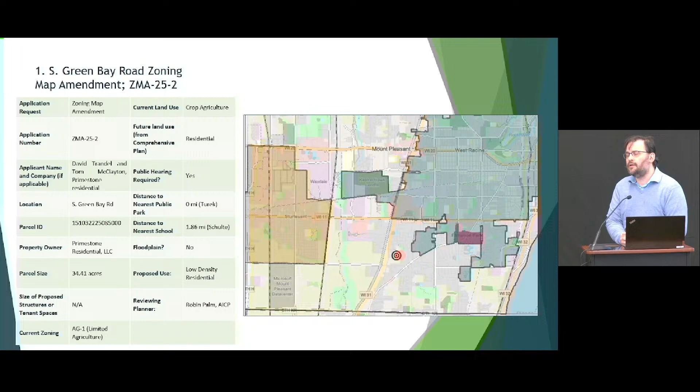No, I do appreciate that, I understand. The reason I ask is that in the context of this development application, previous discussions were also about dedication of the land to protect the wetland. So I'm thinking, in the future with respect to this zoning and this plat, how do we ensure we pursue that path of land dedication instead of the fee? I understand it will be a down-the-road negotiation, but I don't know how to protect that.

The area identified for the Root-Pike WIN plan, as well as the stuff adjacent to James Turek Park, none of that has ever been developed in any of these iterations of plans. That has always basically been the wetland area or an outlot. As you get further away, the only two wetlands actually disturbed are very minor ones that would be filled using a DNR fill permit, which is allowed for areas under an acre, I believe. I'm not super proficient on that.

That is definitely something we can talk about, and since they propose to dedicate that entire area you're talking about, that would be up to you guys on the village board. Okay, thank you.

Robin, go ahead, Tom. Since you two have introduced the concept of dedication of land in this park area, I want to ask, based on your notes, this option exists for the village to take land for park purposes in lieu of park monies. This seems like the perfect candidate to do that. You have a park right there on the edge - if ever you're going to do this, why isn't this the time to take parkland when it's adjoining an existing park?

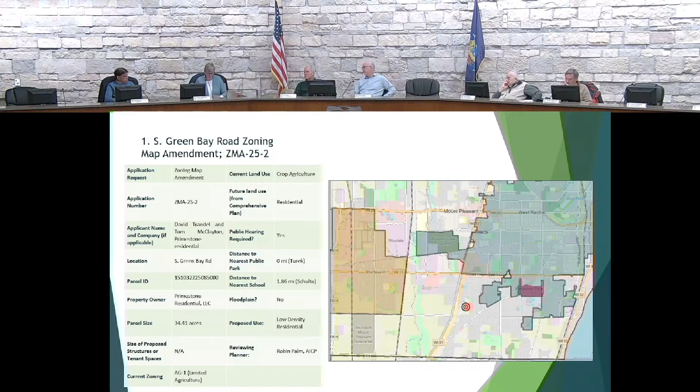Mr. Chairman, yes, Nancy, to Robin. I have a couple of comments, as a follow-up to Commissioner Van Beckham. My first question, Robin, is what are our current park fees, the park impact fees?

I think it's $1,100 a lot or unit. It's more nuanced than that. Hold on one sec, it might have been revised since then.

All of the impact fees are collected by the building department when permits are pulled, so I never get to see those. Studio and 1-bedroom is $550 a unit, 2-bedroom is $825 a unit, and everything above that is $1,000 a unit.

So in order for the board to consider taking that dedication, they'd have to be looking at the value of the impact fees. Those impact fees have timelines on them for use, and can be used in any park within our park system. So that's going to be a big decision for the board to make, to lose that kind of revenue for this area.

My second comment is, like Trustee Boccia, I have been receiving phone calls actively from the neighborhood. One question that has come up was regarding that park dedication and its presence within our land use plan. I got home from a public hearing in Kenosha County last night, where I was promoting approval of the Root-Pike WIN South Branch project in Kenosha County to help finish our leg. It was unanimously approved, by the way.

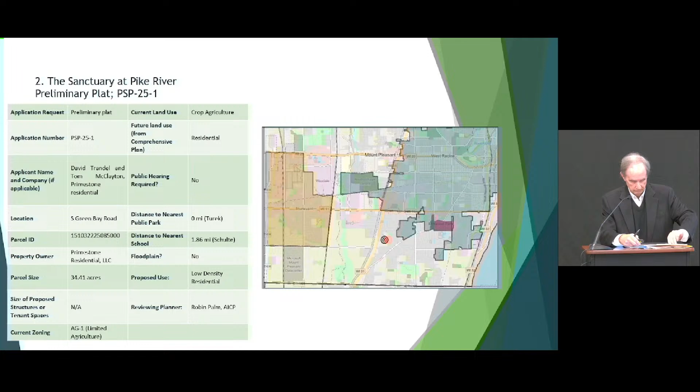As soon as it's up, I'll... one folder up from that. There we go, it should be there now. Okay, go to that. Do I move this forward? Yeah. Robin?

This is an aerial of the site, and we just talked about Turek Park. You can see on the north there, the vast majority of the park is to the north. I don't believe there's much, if any, parking for that park. This site drains from south to north, so it drains toward the park, which is why our plans show the majority of the stormwater ponds on the north side of the site. On the east and south sides there's residential. On the south and east is the Serbian church, and then our entrance we have some land on Old Green Bay Road. And there's the Biscayne residential in the northeast quadrant.

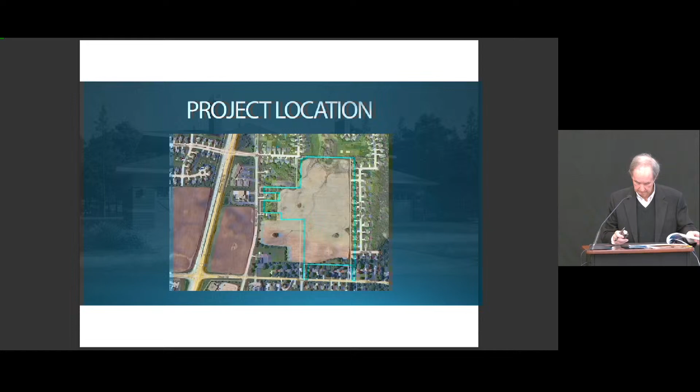As we talked about, we're talking about RL1 zoning. When we first approached the Plan Commission and the board, with Robin and Sam, we were contemplating much more moderate zoning, and I think the first time we looked at this, we were almost up to 300 units. The first presentation we made back in January of last year was 213 units, with the vast majority being 4, 6, and 8 unit buildings. We've since reduced that to a total of 103 lots.

There's 46 single-family lots, basically on the perimeter on the east and on the south along Royal Oaks Drive and Brown Road. In the interior, they are duplex lots. They're duplex, not twin homes, so they're contemplated as just one lot for 2 houses. But that's how we've set it up, our civil engineers set that up nicely for us.

This will give you an idea of the current layout. As you can see, the dark blue on the left of your screen is actually north, that's where all of the stormwater will be detained. There's about 3.5 acres of wetlands, and about 2.5 acres will be preserved on the site. There are some small pockets we're working with the DNR to fill in, and I think we're in line to get the permits to fill in those small areas. There are 7 areas of wetlands total, and the 2 primary areas on the north are the 2 that we're retaining.

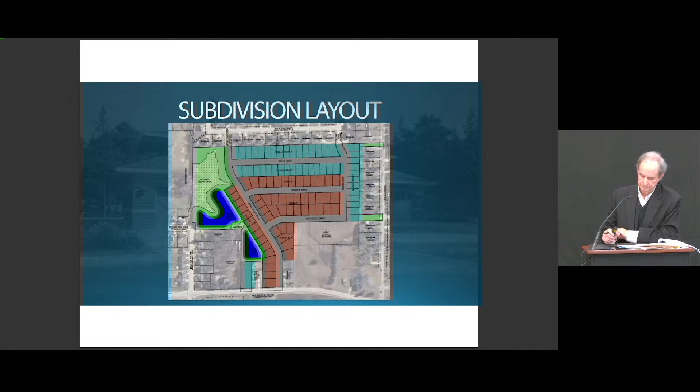Cyan? Got it, and the color, right? Brown color, the duplex, these are duplex. Just want to make sure the brown lots are the duplex lots. Thank you.

This is an example of the duplex. You'll notice the garages are separated. We haven't made up our mind whether they should be together or separated, but hopefully this gives you an example of what we intend to build there.

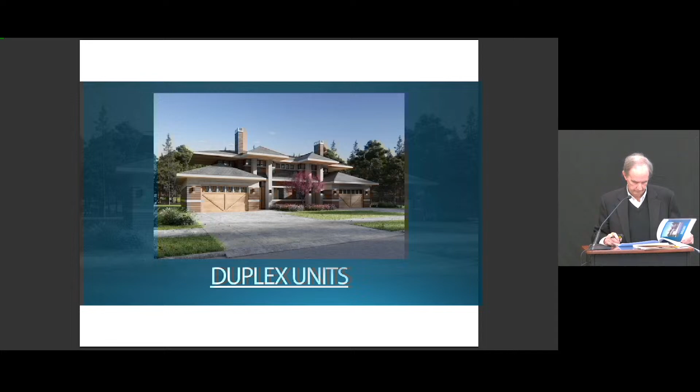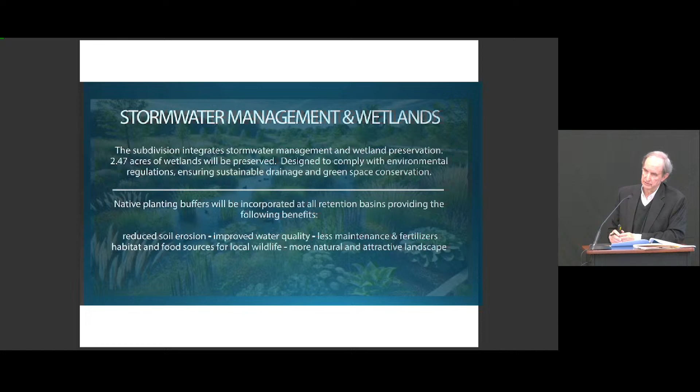We've been working with our civil engineer, Nielsen Madison Barber, to create a stormwater system that will handle the entire site without any issues. We're going to preserve about 2.5 acres of wetlands, primarily on the north, and along those wetlands we'll be planting flowers to make it look very attractive.

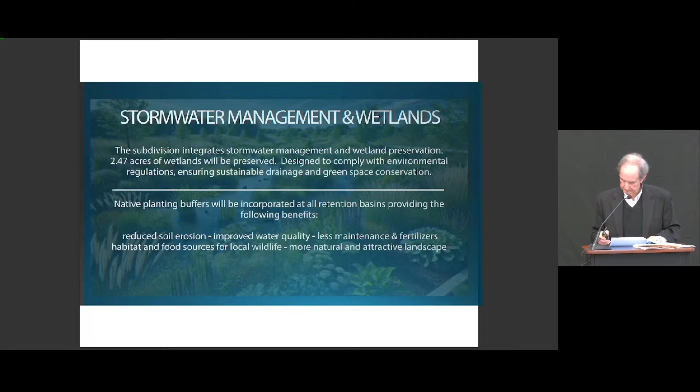One of the things we're focusing on recently is the need to create a homeowners association to handle primarily drainage, stormwater, and other common expenses, but there are other things that will be part of that. So each unit owner will have a proportionate share of these common expenses.

The only thing that's maybe different between the duplexes and the single family is the roof and the exterior, because you've got maybe 2 families living in the same building, so we need to accommodate the possibility that one of the roofs goes bad and the other doesn't.

Over the last year plus, we've attempted to reduce the density. We've gone from 213 down to now 160. We've reduced the density of a particular lot, whereas we had 4, 6, and 8 unit buildings. Now the maximum is a duplex, which is a 2-unit building.

One of the things we've done here, as you can see, there were originally 5 entrances: north and south on Providence, Old Green Bay Road, and 2 smaller entrances onto Royal Oaks. We've requested a reduction in the number of entrances from 5 to 3, and in meeting with the neighbors and thinking about it with our engineer, eliminating the north and south entrance to Providence Drive will reduce traffic significantly, cut-through traffic, raceway traffic, however you want to call it. It'll also help us enlarge the stormwater basin on the north side and help the drainage considerably.

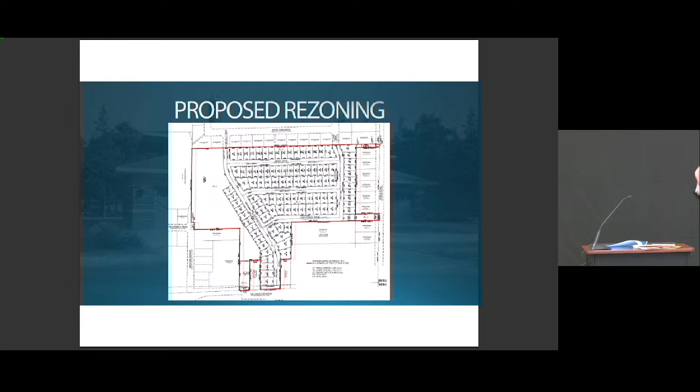There's one thing - as you can see, there's an entrance off of Braun Road, the bigger of the two. That's actually a dedicated driveway easement, so we have to plat that, but it's not part of 103, that's Unit 104. So what we did there is just leave that as platted. We don't intend to do anything else because we can't - it's been an easement for probably 15 years.

The other thing we did from previous plans is we moved the entrance off of Green Bay Road further south, which we thought better, more toward the church site than the other site there. I think that helps the neighbor, Mr. McGraw, on the old Green Bay Road. And I think the closing of the north entrance to Providence Drive is critical to the neighbors, and it also helps us in expanding our stormwater system.

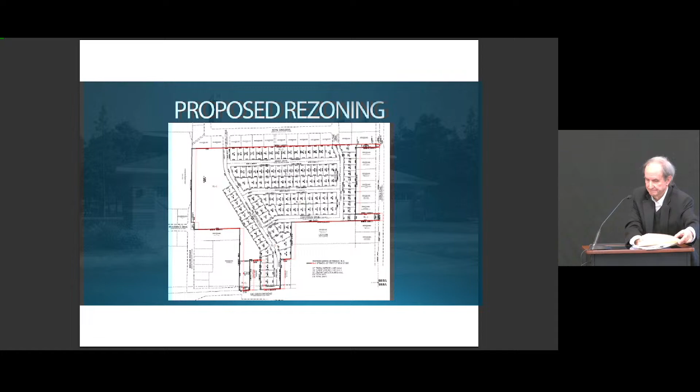Thank you for the presentation, and I can see from some of your additions to your restrictive covenants that you are hearing us a little bit better. I have a question regarding the duplexes.

Within our code, you showed us a beautiful picture of a beautiful structure, obviously very North Shore, and having sold real estate in that area for 15 years, I'm very familiar with it, but it's a beautiful building. My assumption is that you might potentially be, is the intent that one person is gonna build that 2-unit building and own both sides? Or is your intention that potentially one side would be one owner and the second side would be a second owner?

It could be somebody who owns the building and rents out the other one. It could be either way. We'll set it up so that each of the duplexes, 57 lots for duplexes, which means 114 units. So there'll be 114 unit owners that will pay into common expenses.

And I guess my question, and this might go to staff, Sam or Robin, when we've talked about the code and we've talked about these duplex lots, I've had a lot of questions on them over different projects we've seen. So it's my understanding that under the RL1, let's pick any lot that's a duplex, say lot 27, or a lot you choose to build a 2-unit home on. Under our code, in order for you to sell off that second unit, it's my understanding, from talking to staff, that lot would have to be further divided in order to do that.

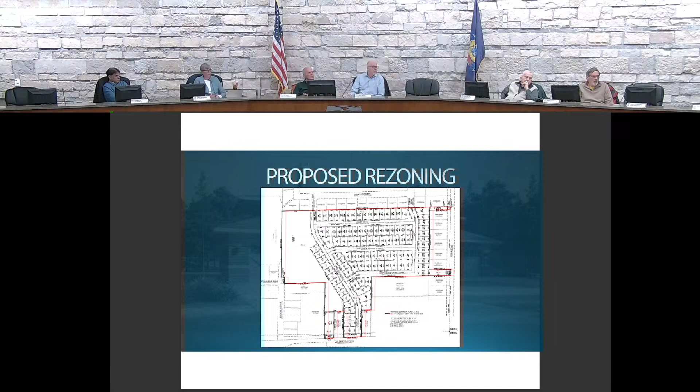Robin, where do you want to go from here? Okay, so if you have any other questions of me, you can ask questions of me. Otherwise, I would prefer if we basically decided and voted on the zoning issue.

If you wanted to take any other comments on it, now would be the time, but you'd probably want to limit it to the zoning issue, because we don't want to go far afield into all the things we'll discuss with the preliminary plat, which includes roadways, park dedication, lot sizes, entrances, exits, and all that sort of stuff. So that decision is up to you guys, but my recommendation would be to consider the zoning itself, RL1, and then move forward to the preliminary plat.

Is there any public comment specifically on the zoning? Not on the preliminary plat, but on the zoning specifically? Please come up, name and address, please.

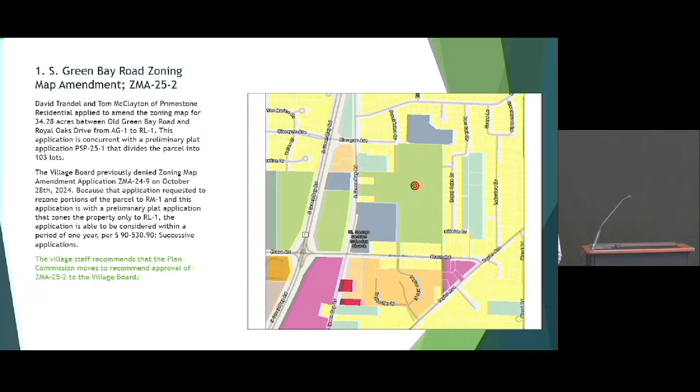My name's Ted Snagowski. I live at 3627 Providence Drive, so I am one of the neighbors. There has been movement, and you said they're hearing us a little bit, but we continue to come back to these multifamily structures on a single lot that doesn't fit with anything in our neighborhood. So you go RL1, a zoning change that was, I'll say in my words, snuck through during COVID, that allows 1 or 2 structures on a single lot.

Just like this whole process, the communication has been terrible. Again, we got no notice of this meeting. We're 300 feet from the edge of this development, and we got no notice. Thankfully, Ann and a bunch of neighbors are still keeping an eye on it. So I reject the RL1 without the same restrictions that they're imposing on the east and on the south. Impose a single structure per lot under the RL1. Otherwise, get rid of the RL1 — it's meaningless.

To that end, I know I speak for a lot of my neighbors, and we'll all be at the meeting next week. But this is a terrible piece for our neighborhood. You sit here and talk about waiving fees and taking park space, yet we keep being told this is for revenue for the township — we're talking out of both sides of our heads here. I sit here in this meeting, and I'll be honest, I wonder, and I'm asking a real legitimate question of all of you: why do you continue to have this group if it's just going to rubber stamp these types of programs every time they come up? That's what it's done so far. Why is this meeting during the day when most of my neighbors can't get here, when other communities have figured out planning commissions should be held when the public can actually attend and see the planning? So I oppose the change to the zoning as it sits now.

I want to add in for all of those that might not be familiar exactly what the term conservation plat means, not to be confused with the general idea of conservation, where we set aside natural area to be conserved. It's a very specific type of development where all on one parcel you have a portion that's developed, contained within a small portion, and it's also attached to a portion that remains undeveloped, and they're kind of married together. It's not like a pure park or preserve, it's actually a developed parcel. It's just the ratio of development to preserved land is set.

Sorry. I always got a 'but actually.'

All right, any other discussion on this? Otherwise, if not, I'd be looking for a motion.

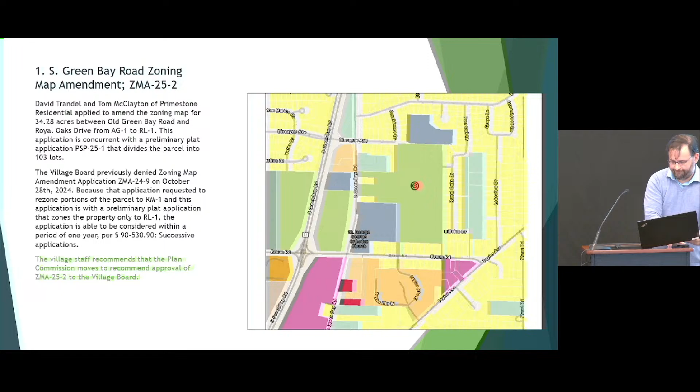Chairman Davis, I think we have tried to make sure as best we can that we keep this discussion regarding zoning to zoning. And I know that it has had to take some walks off into the plat, and I really think in this case the plat is the bigger decision, and is gonna have even more conversation. I think at this point, what we're looking at is what is the highest and best use for 34 acres of infill site surrounded by existing residential zoning.

We have already made it clear that the RM zoning category is too dense, too big a units, and not acceptable to the Plan Commission and the Village Board. The developer has now come back to us with a plan that is a combination of uses allowed under the RL1. Although I know there are those in the audience in the neighborhood that don't like the idea of the duplex lots, the reality is that in this design, which is what we'll be talking about next, they are concentrated to the inside of the development, and very few, if any, of the existing neighbors are gonna see or feel the impact right against their properties of a two-unit property.

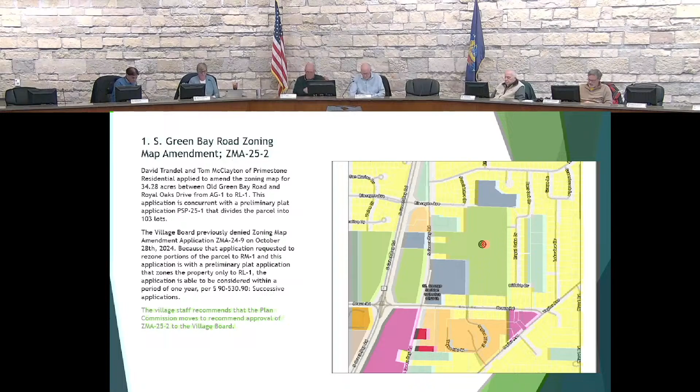That is for the zoning amendment. Next, we are moving on now to the Sanctuary at Pike River preliminary plat, PSP 25-1. Again, there will be time to speak.

Okay, so we're going to try to get through the main things we normally do, and then address the decision you get to make and the discussion we get to have. So this is PSP 25-1.

As before, it divides the parcel into 103 lots. There is information about lot 104 not actually being usable to build a home on because of an easement. That's new, but we will talk about that when we get to it.

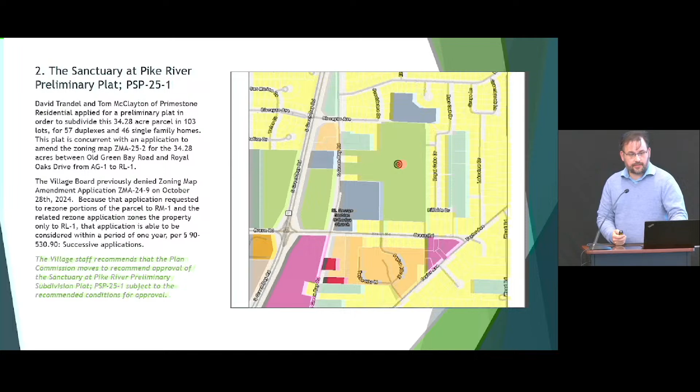Okay, so it's for 57 duplexes and 46 single-family homes. Although, as we said, the code does not specify necessarily which is which, the developer has indicated that in its site plan application. The zoning would be RL1, and we're going to move on to this one.

So we reviewed this, the overall site plan, or the preliminary plat as submitted. On the left in small print are the conditions on the site plan as is, assuming the exception request is granted. A lot of that is either boilerplate or things we ask developers to add to plats that aren't standard—we ask for a little more information on plats than normal.

Two of them are basically related to finalizing engineering and stormwater plans, which is always worked out between a preliminary plat and a final plat. One is about the public walkway created as part of the Royal Oaks subdivision between lots 82 and 83. There are also 20-foot vision triangles at intersections, public street lamps on intersection corners that need to be indicated on the plat, and street trees—those have to be approved by the Public Works Director.

To clarify, we haven't had these conditions left off of CSMs for quite some time. The CSM actually has them because we sent it back with those comments early and got them back, so it's not necessarily a huge thing.

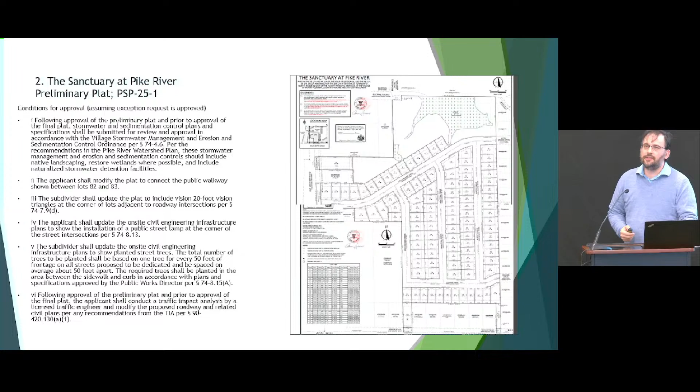Okay, so you can review our executive summary about the things that meet the requirements and so on and so forth. It's rather extensive, as well as the fiscal analysis, which is fairly similar to where it was beforehand.

What I'll get into is mostly what we're going to be discussing: the street arrangements. Our subdivision code states that the street layout shall conform to the arrangement, width, type, and location indicated on the adopted county jurisdictional highway system plan, the adopted village official map, or the adopted village comprehensive plan or plan component. The official map is the one on our GIS.

This is the current accepted village proposed road layer. I don't know if I've talked to you guys about the proposed road layer, but the origins of them are sort of shrouded in mystery and legend, but they've been around for a long time.

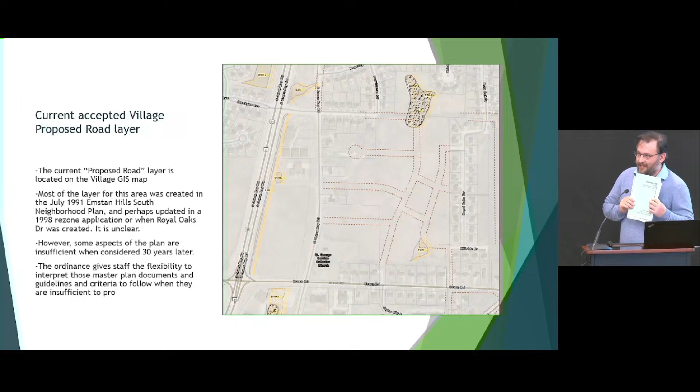However, I've consulted the ancient tomes and found where this particular one came from. This is from the neighborhood plan, Emstan Hills South, from July 1991.

It was also updated in a 1998 rezone application and/or when the Royal Oaks subdivision was put in, because in this plan, Royal Oaks Drive doesn't exist or isn't even proposed.

So now when we're looking at this particular layout, this is not what we've been talking about for a while. So how do we get from there to here? Well, some aspects of this proposed road layer are insufficient 30 years later for lots of different reasons.

The ordinance does give staff the flexibility to interpret those master plan documents and guidelines to follow when they are insufficient, and also to propose new alternatives.

So when you're looking at this particular layout, what jumps out is what doesn't work, and what we have never really asked of the developer, is that one of the proposed roads, the extension of Biscayne, goes through wetlands in the Pike River watershed protection area.

So the exception process is this: in the judgment of the Plan Commission, it would be inappropriate to apply literally the provisions of Articles 7 and 8 of the ordinance, which basically say that you have to meet the comp plan road layer. Because exceptional or undue hardship would result, the Plan Commission may waive or modify any requirement to the extent deemed just and proper. Those are the four conditions: exceptional circumstances, preservation of property rights, absence of detriment, and then it requires a majority vote of the Plan Commission.

Can I go ahead, does anybody have any questions on process stuff before I get into those? We can move on, or even discuss the conditions that were covered at the top of the hour.

I'll ask this to the developer. Tom, do you want to, so I have these basically copied straight from your addendum, which they have all got in their packets. Sorry for the small text, there's nothing really I can do. Do you want me to go over both of them and present both of them, or do you want to present your argument? Okay, all right.

So basically criteria 1, exceptional circumstances: there are exceptional, extraordinary, unusual circumstances or conditions where literal enforcement of the requirements of the ordinance will result in severe hardship. Such hardships would not apply generally to other properties or be of a recurrent nature to suggest that the ordinance itself should be changed.

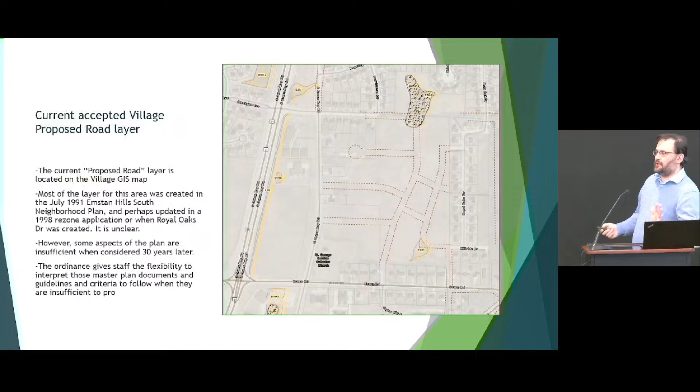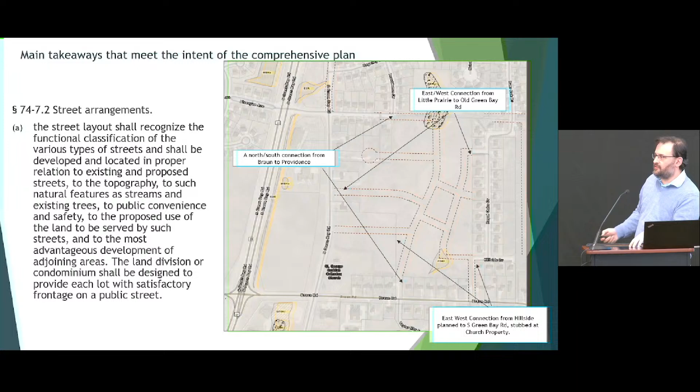I'm almost done, so there's only this last slide or couple slides. So yes, we proposed basically traffic calming. We haven't done a lot of that in Mount Pleasant with our roadways, so that's something that's rather new, and we have gotten requests and claims for that, and we're trying to implement them into new designs.

So the last one is absence of detriment - that the exception or modification will not create a substantial detriment to the adjacent property, will not materially impair or be contrary to the purpose and spirit. The developer's justification was that it's compatible with surrounding land uses, it's residential on all sides, and with the exception of the church, there's no change in the proposed land use, so there will be no increase in demand, and that the proposed amendment would allow the property to be developed in accordance with the approved comprehensive plan. The proposed amendment is in substantial compliance with the current comprehensive plan.

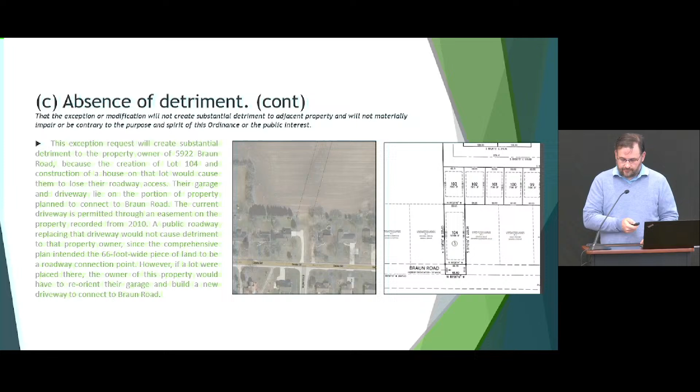However, replacing that with a roadway would cause no change there. The second specific property is not as significant, but the owner of 6015 Biscayne Avenue would lose the ability to create up to four 63 by 110 lots from the back half of the property. They have a property that goes almost two acres back. By not connecting that, they would not have access to that property—not all of it is being used as backyard or anything like that.

Is that owner here, or have they contacted you? No. This is theoretical, and they would have that ability, but if you're looking at it from a monetary perspective, this is $400,000 at least—the difference in what that land is worth with a road next to it versus without one.

And that was a road that was always planned to be there in one shape or another. However, we don't know whether they had that intention, but that is an interpretation. As I said, this is not as strong as the one on Braun Road, but it's the justification we have. The other thing is that it's basically a detriment to the village itself and to the property owner association, because the exact nature and responsibility of the large unplatted area is unclear. We'll talk about that in a little bit, but as it stands, it can't all be dedicated to village park purposes.

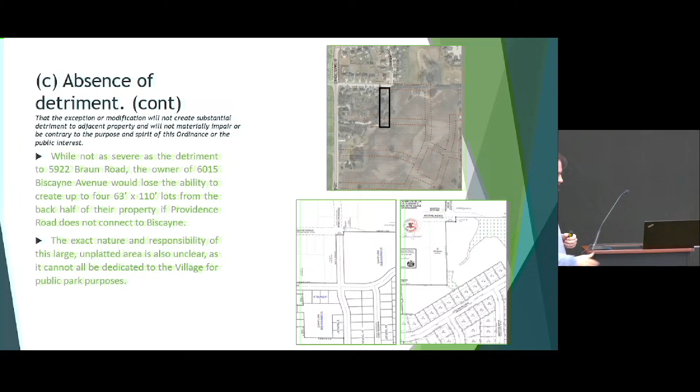So, should I throw it to Tom now? Tom? Okay.

Clearly, the more important of the two is to close the north entrance, because that affects everybody on the north portion of this site. The south is a driveway easement. There's 104 lots, and we exclude that from our count, so that's 103. We didn't plan to do anything. All that would need to change if we had to open up the south entrance to Providence Drive is we'd lose one single-family house, number 104, north of the driveway.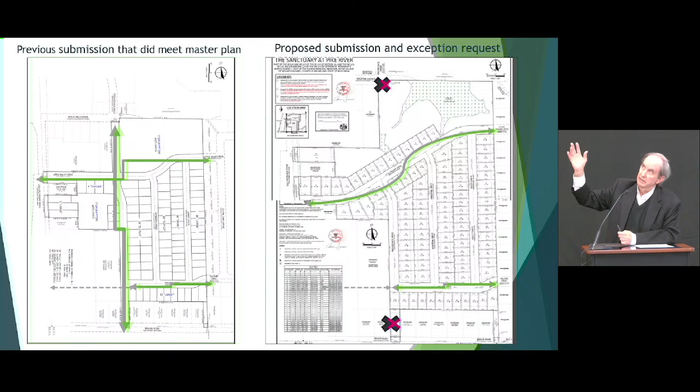We've met with the neighbors and tried to accommodate them. I think they had some great suggestions on Providence, and that's all we're asking, is that you shut down the north and south entrance to Providence. The fire department has agreed with 3 entrances, according to their latest response, and if we had to choose, I'd close the north entrance.

Yeah, staff is in agreement of that priority. If you had to lose one, it would be the one to the collector, not to the residential street. But this general area has issues with dead-end roads, and a lot of them have been cut off for one reason or another. It kind of funnels all of the traffic to certain roads, such as Regency Hills, such as Taylor, because there's no actual way to get fully north-south or fully east-west.

So that's just caution. The other thing is that since it is an outlot, there could be alternatives in order to basically reserve that in case conditions change, or there is a proposal for the back half of that property or something like that. So that is where we're standing.

Our civil engineer is right here. He can address this question a lot better. Sure, allow him to speak. Sure, absolutely. Go ahead.

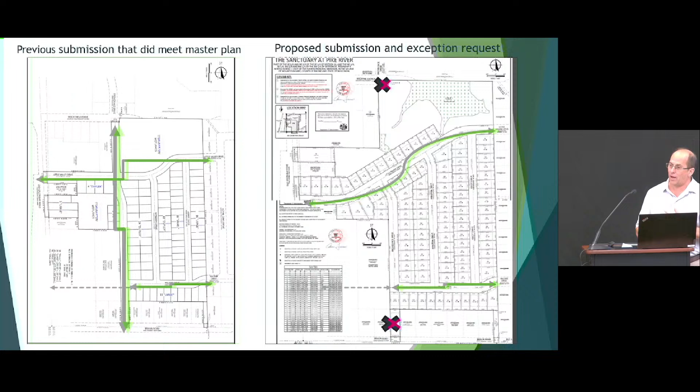So again, that becomes slightly challenging if Little Prairie Drive is moved back to be in line with Lot 16 and tight to the north line here. In order to have the proper grading and drainage, we'd have to work with both those properties to install that to some degree. I'm speaking from a high-level view because we haven't looked at the grading analysis for that yet. But we would have to work with them to gain easements to be tight to their property line. The road would be up against their property line, the right-of-way.

Correct. And so you've got a terrace and a sidewalk behind your paving and your curb and gutter. Those might be temporary easements, but that might be to their advantage because now they have access to a public road, which would create value for their property. Anyway, I've gone too far, I apologize, but that's my question, and that's of great concern to me.

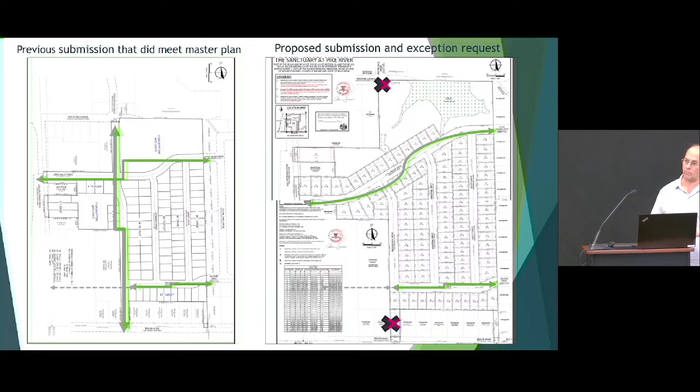In addition, and I don't necessarily need Mark to stay up there for this, but regarding the Braun Road access, I've made some phone calls. I have some experience with traffic impact analysis, and I was very concerned about that because going down to three accesses — the neighbors have always said the more accesses, the more traffic is going to run through our property.

What I have found in dealing with traffic impact analysis and multiple accesses, particularly as I look at this location, in my opinion, the more accesses, the less traffic is going to be flowing through each, as they get used to it, because you'll have more options within that neighborhood to go left, right, north, or south. If I live along Lockwood, or even north in the streets that feed through Lockwood, the chances of me turning into this subdivision to get over to Old Green Bay Road or Braun Road are slim to none. I'm going to keep going down Lockwood and get to Braun Road. I think most of the cut-through traffic from this subdivision is going to come from within itself.

So I made a phone call to one of the traffic impact engineers I've worked with many times over the years. We talked about this situation, went online, and Googled it. So there are two comments I have.

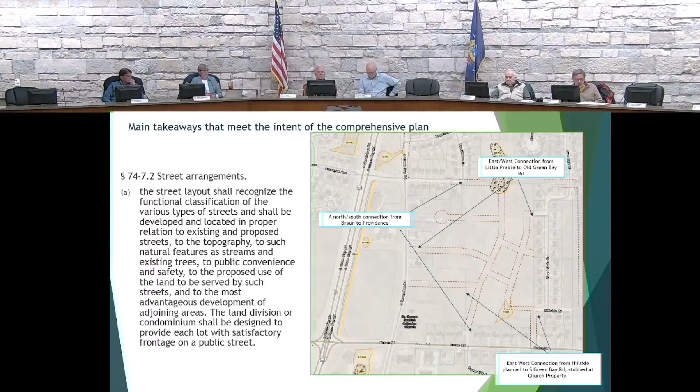My sense is, given where this property is located, when people are leaving the neighborhood, they're generally going to want to go north or south on Old Green Bay, or east or west on Braun. Giving them the only option of going east into yet another neighborhood, then snaking a couple more turns to get to Old Green Bay or Braun, isn't a good forced flow. I understand why some people not on Royal Oak Drive may like to funnel it that way, but I don't know that makes sense. My sense is, at the very least, it's got to get pushed out to Braun for relief from everyone going west to Green Bay, or you've got to give them Providence to the north - one of the two has to be made available, from my perspective. That's just where I'm at.

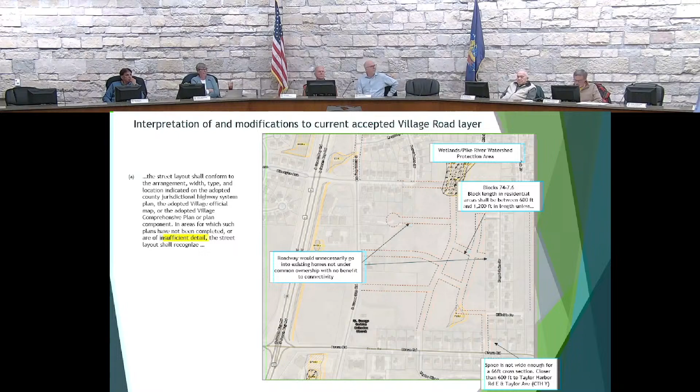As I said about half an hour ago, regarding the Providence Drive entrances north and south, we listened to the neighbors, and everyone we talked to said you can't have Providence Drive on the north side open to public traffic, because there's a raceway and people will cut through. Maybe some of you can agree to that, but we're perfectly fine with opening the south entrance to Braun, because that's a driveway easement. The only thing we'd have to do is change our plan to eliminate one of the lots. That's it, it's ready to go. I'm not arguing over the north side, by the way. I hope you don't think I am. We understand, we heard that before. But we also have to be cognizant of what good traffic patterns are.

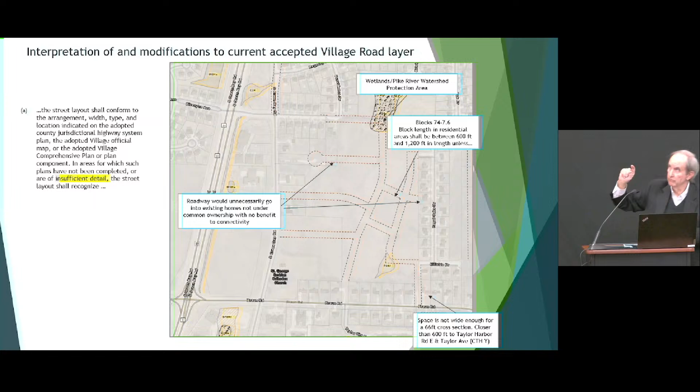I agree 100%. The other thing is, we moved the entranceway off of Old Green Bay. The roads we were given a year or so ago by the village said you had to have a north-south road and an east-west road. So all we're saying is we have an east-west road, and we'll have a north-south road, but close the north Providence Drive.

And that way, if people from inside want to exit on Braun Road, they can exit on Braun Road. If they want to go to Old Green Bay Road, nobody from that subdivision is going to go through Royal Oaks Drive to get to somewhere else. That doesn't make any sense for those people - I'm not talking about you. But if we have 4 entrances versus 3, that's perfectly fine.

And I agree, it makes sense. We're just trying to accommodate the neighbor who's got his driveway there. They're gonna get used to a 66-foot road that actually has traffic on it, as opposed to just his car going into his garage. But I think the neighbors to the north on Providence Road are significantly affected.

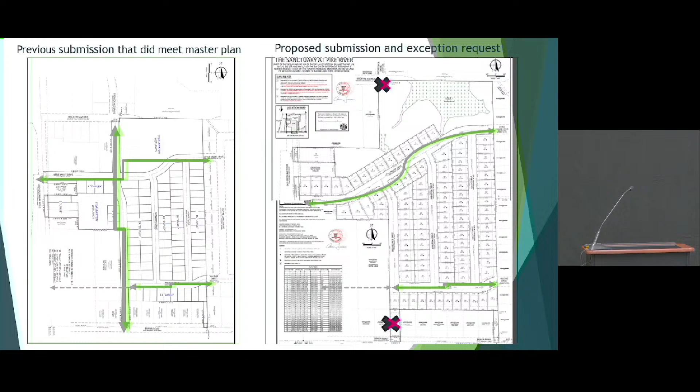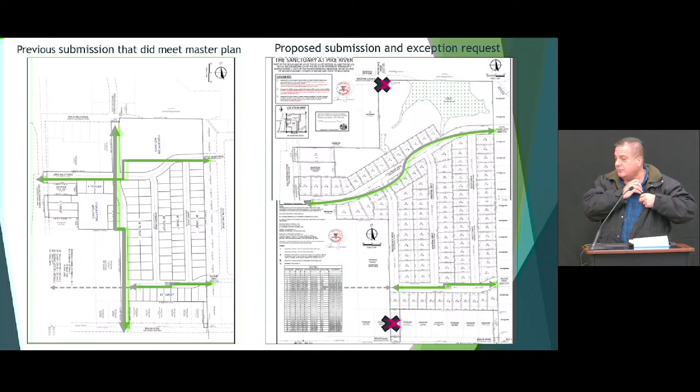I'd like to say I agree with almost everything Ann said. Ted Snigowski, 3627 Providence Drive.

Ann's absolutely right on almost everything, but I'd like to see go further as far as the deed restrictions to get rid of the duplexes. Our entire neighborhood is single-family homes. Bringing in the duplexes and things like that don't fit into our neighborhood.

I appreciate the fact that they took out the North Providence entrance, because I was gonna mention the Pelletiers as well. They're friends of ours. They've had their home run into 3 times, and it would be the exact same situation at the end of Providence Drive in Regency Hills, same T-type intersection that keeps causing this as people speed through our neighborhoods.

Ann's absolutely right, the traffic is terrible at times. I'm thankful my boys are both adults now, but where our neighbors have young kids and grandkids starting to come over now, it's frightening to see the people that speed through our neighborhood and S-turn even through Providence Drive right now. Heck, we're even a shortcut for the fire department to get to Regency Hills. So it is a terrible thing.

What I'm hearing here is I don't believe you have enough to continue forward. You have a lot of questions as far as the traffic plan, as far as a lot of other things. I'm asking, as a resident of Mount Pleasant for almost 30 years now, that you take a pause. Let's relook at this. We're not opposed to development, we're opposed to the wrong development that doesn't fit our neighborhood.

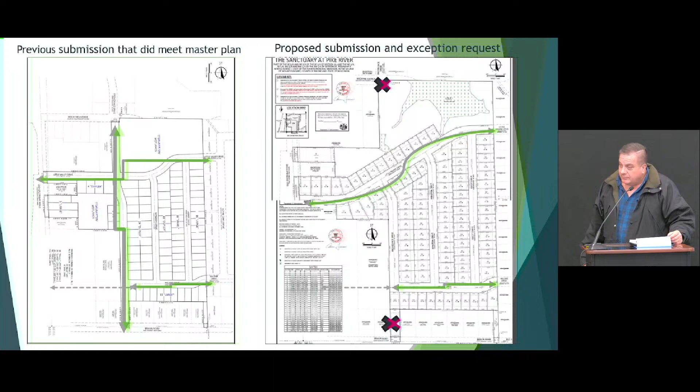Correct me if I'm wrong, Robin or Sam, but if you chose to, you could put a second structure on your property. I've never looked and pursued that. Now, I don't know exactly where you live, but just in general, RL1, am I correct? No, there are covenants, so I live on Royal Oaks Drive, and there are some illegal, smaller shed-like structures, but the developer of that land, now deceased, there are some pretty strict rules, so it might vary by location. It might vary by covenants, but by ordinance, all of them could put another home on their properties, right?

And if, with the developer having deceased, I would assume at this point your covenants and restrictions have expired, and so that means they wouldn't be enforceable. Right, so they're not enforceable anymore. So, and we don't want to argue with you guys about that.

I think the reality is, this is a very tough project, and I'm going to tell you that I have put more hours into studying this and trying to make sure that I, as a trustee, am looking out for the neighbors, but the village also. The neighbors can't always tell us what to do, because it's never in their backyards. I have looked hard at every aspect of this. I have spent hours and hours and hours on it, doing research and trying to, as Mr. Giordano said, determine if we're at the right compromise yet.

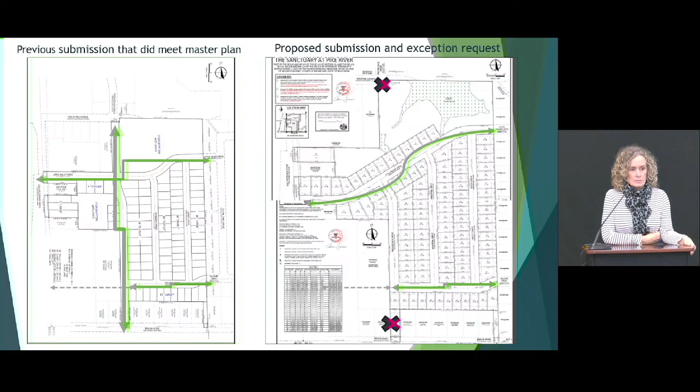Okay, I'll ask you later. Okay, thank you. That's it. Thank you.

Mr. Chair, if I could - we've been talking in circles a lot. We're almost 3 hours into this thing and we have a couple other items on the agenda. I think you have a couple options here. You can either vote to approve today, recommend approval, recommend denial, or table the plat. You've already recommended approval of the zoning, so that'll go forward to Monday night regardless and have its public hearing. The board can do with it what they will at that time.

What they do will probably depend on what you do with the plat today - either table the zoning to hold it up to match, or they could approve it since the zoning is essentially conditional on this plat getting approved anyway. So it depends on the motion, who wants to make what. If you all just don't like this at all, I'd recommend you recommend denial. If you think you can add one or two conditions per Commissioner Van Beckham's comment to address some of what we discussed today, then I'd recommend you move to recommend approval with whatever conditions you'd like to add to the ones already on there.

If you'd like to table this, I would recommend you specifically identify the items you would like them to include, so when they bring it back, we're not bringing it back too early or too late. We've checked all those boxes, so when it comes back to the commission, we know we've addressed all your concerns. On the last point regarding the deed restrictions on the lots, the developer deed restrictions are agreements between private property owners.

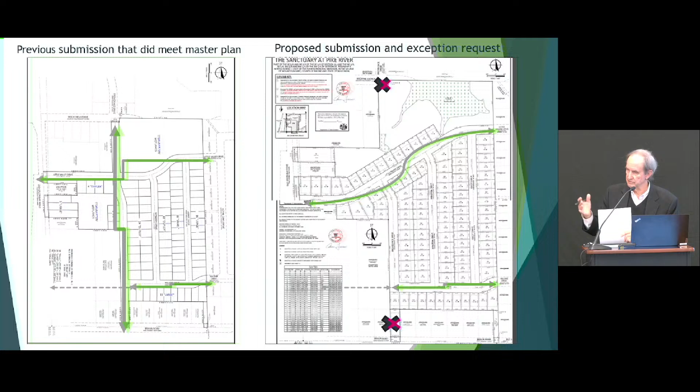So any other open items, I'd be happy to address those, but the deed restrictions, we've said this to Ann and her neighbors, we're willing to say we're going to build a single-family house. And the duplexes, they're only 70 feet wide, so first of all, with 70-foot lots, we cannot build a duplex on any of the single-family lots because they're just not wide enough. So we have to totally redo that.

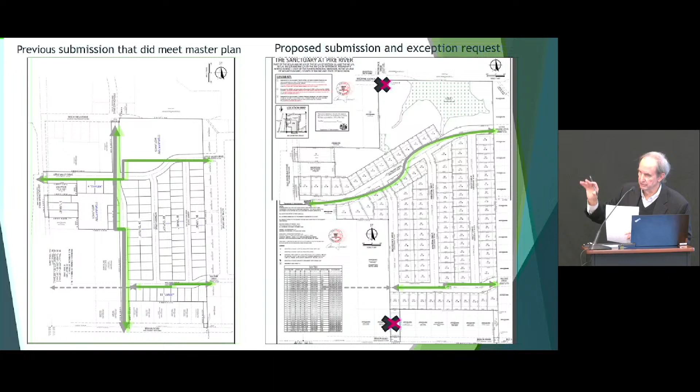So a recommendation would be to acknowledge that the developer is willing to identify single-family homes on those lots. We don't want to make it part of our motion, just that we are recognizing that he is going to do that. Okay? You can't, because it's illegal for the village to put it on.

If he is willing to do it, that's fine. That's what I'm saying. We are recognizing that he is willing to. We are not demanding that he does it. We are recognizing that he said he will do it.

The other thing is, as far as tabling or whatever, the reason with the application for the exception is that you guys are going to have to make a decision on these items. Once those decisions are made, then it's black and white. I delineated them before, but it was Braun Road, Providence, and then you guys brought up the location of where it exits onto Green Bay Road. So those are things that even if you tabled, you would have to make a decision on. And if you made a decision on it, well, everything is done, basically, for the most part. So that's where we're at.

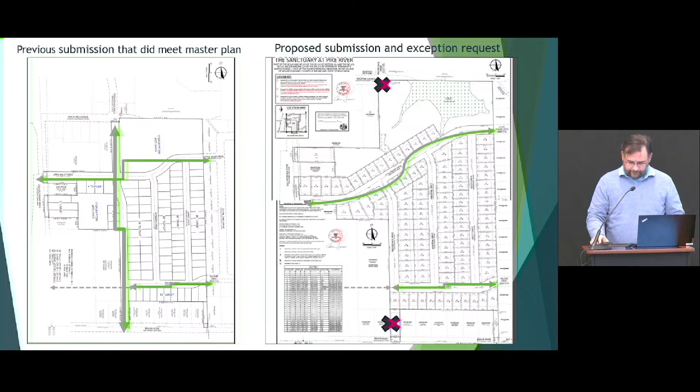Sam, are you comfortable with my making a motion based upon the verbiage in that green ink at the bottom of the first page of this set of materials? I'm going to make that recommendation subject to the conditions for approval and adding two conditions, one for the Braun Road egress and secondly for the designation of lots. And again, have a vote, and then if that doesn't fly, someone else can make a motion. I am comfortable with that.

All right, shall we? Mr. Tom, would you be willing to also add the revision of the ownership of the outlots from the developer to the percentage interest, which is preferred by the village? In other words, right now, that's part of what they've shown us, that they are going to retain ownership of the outlots and the ponds. We as a village would want that ownership of the outlots and the ponds to be a percentage interest of the residents within the subdivision.

I understand the concept there, but Sam, I'm comfortable with that. Section 74-2.6 discusses common areas or facilities shall be held in common ownership as an undivided proportionate interest. So I think that's supported by the ordinance. So wouldn't the ordinance just deal with it? I don't know how to phrase that motion all that well.

It would, but you can just make a note that they'll revise the HOA. What they have presented does not meet the ordinance. How do you want to see it? You want to see it in the HOA docs? Yeah, that would be it. I would pose the motion, amend the association docs to meet section 74-2.6. That's good enough. That should cover trustee Washburn's concern. Shall I take a crack at it? Yes, please.

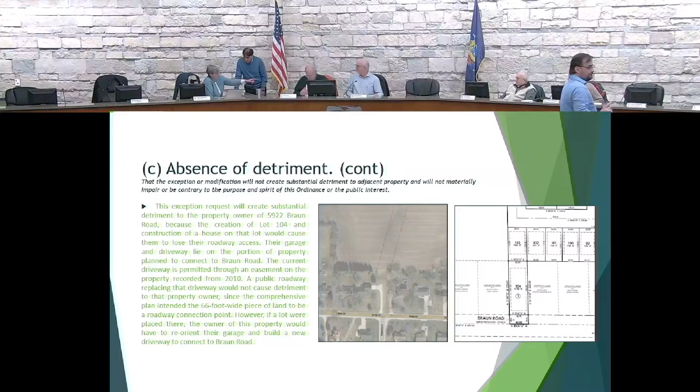I have to be at the water utility at 5:30. Into the meeting, next on the agenda is the Sheridan Road Certified Survey Map, CSM 25-2. Sam?

Mr. Chair, members of the commission, the CSM proposes splitting the existing parcel into two lots on the corner of Pratt Avenue and Sheridan Road in the Lake Park neighborhood. The application follows the land use element of the multi-jurisdictional comp plan. The village master bike plan recommends bicycle lane improvements for Sheridan Road, such as bicycle lanes, however the applicant is not responsible for those improvements.

The park and open space plan for the village of Mount Pleasant does not recommend anything for this property. From a fiscal impact standpoint, this is currently kind of an underutilized property, so any improvements look better than what's out there now. But generally, an improvement value for this property is currently $2,800. The village staff estimated 4 units on the site.

After talking to the applicant, they only plan 2, one single dwelling unit for each lot. But that really kind of scales proportionally with the value, so the general assumptions in the fiscal impact are still relatively similar. This performs currently better than the property and still meets our general requirements for a fiscal impact analysis. It's also a corner lot, so it gets hammered with both streets and still does pretty well.

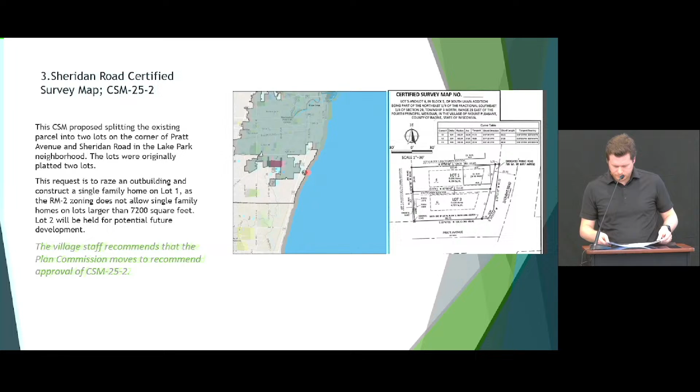Yes, and this meets our definition of moderate density, so you can have a single family home and have a moderate density neighborhood, just like this neighborhood is. So you can have an RM, you can have a single family in an RM2? Correct, there's just a maximum lot size, so we're kind of squeezing them up so people aren't able to do like a 200-foot lot in a moderate density zone. Okay, so to do a unit, as Robin said, you've got to shrink the lots or divide them like they are.

Oh, I do have one more question. Go for it. One of the lots on here, lot 2, the guy's porch on his deck to the west of him is actually on that property. Did you guys notice that?

Yeah, theoretically he could remove it. We'll let them sort that one out. The whole neighborhood is rife with people not following lot lines to a T over time, so it's not uncommon. Typically they'll either deed some over between private property owners or work with someone to relocate a deck. We've seen it solved in a bunch of different ways, but that's for them. We're not touching that one.

No, well, it's good, obviously, because his setback is gonna make a difference. When he puts a building on there, the rear setback is judged to the lot line, so he's well within his rights to completely cut that neighbor's porch off their lot, but typically people find a way to work it out without resorting to that.

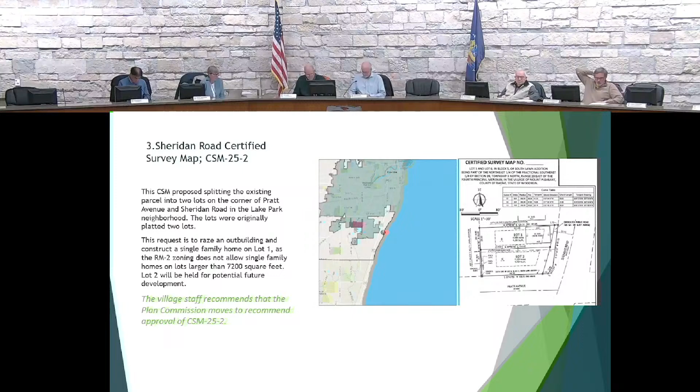All right, next, 8811 Campus Drive Site Plan Review SP 25-4. It's like we're approving our own home edition.

The Village of Mount Pleasant, that's us, applied for a new storage building behind the PD. The building will replace the current trash enclosure, which will move slightly further east. Staff would typically review a project this small, however state statutes require that Plan Commission review public buildings, so you get to review a storage building. Where's the fiscal impact? There is a fiscal impact. The village owns the property and it's tax exempt, so this is paid for by impact fees. It's not coming at general obligation debt or a cost to the general taxpayer. The PD is using its impact fees for this one.

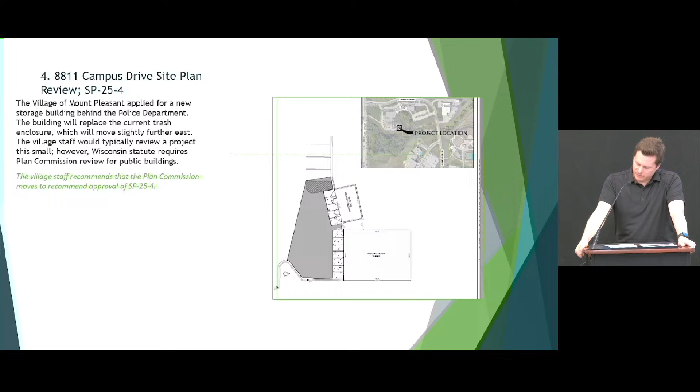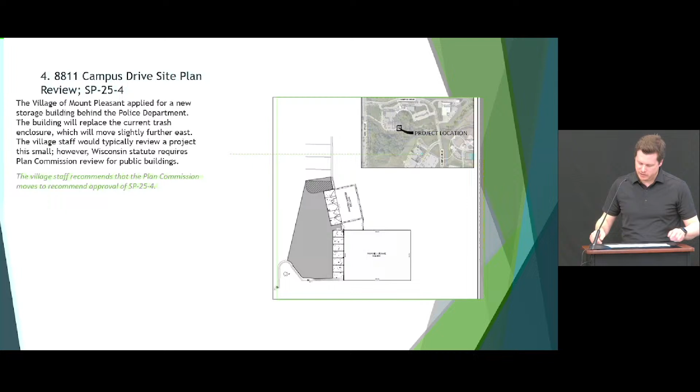It also follows the land use element of the multi-jurisdictional comp plan. The park and open space plan shows a large wetland complex behind Village Hall, as you can see through the windows, but this application does not propose affecting any of those delineated wetlands. The application does not include the 36-inch high parapets required by the division, but I get to approve alternative compliance for things like this. The Village Hall site includes green infrastructure like bioswales and geothermal, does not cost the taxpayers additional funds, and preserves the wetlands identified in the park and open space plan. So I ruled it met the alternative compliance procedures. As a note, we've had a lot of issues with the roof height and design categories, so we will likely tag that for a future update since it's been going to the Board of Appeals a lot. Just put a pin in that, and we'll talk to you about parapets in a coming meeting.

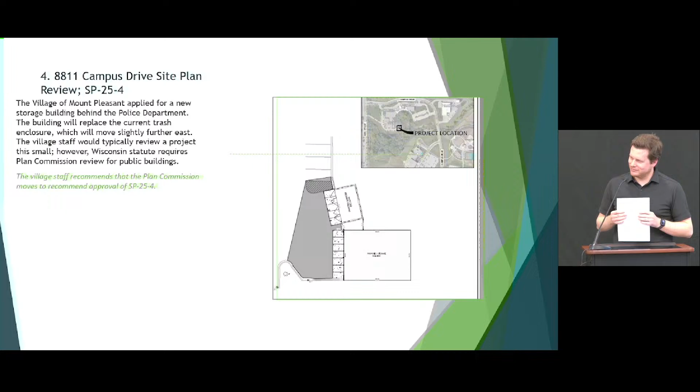With that, we also recommend approval. Where was the landscape plan? I want to know what the landscape plan is. There is no landscape plan. Where's the bike path? Where's the dog walking path? Why would this not be a dumpster enclosure? Because dumpster's a registered trademark that everybody steals. Oh, okay, trash enclosure's appropriate. Why would we not require a landscape plan as far as the trees that we do for anything we do, like our parking lots we put in down on KR and Braun Road?

We had to meet our requirements. That's a great question. The landscaping and screening that relates to trash enclosures, that enclosure does meet the requirements. They're given a masonry wall option, like we give ourselves as developers. If you have a full masonry wall enclosure, you don't need additional landscaping surrounding the trash enclosure. I'm not talking about the trash enclosure, I'm talking about the new building.

Oh, because it's not a big enough change to kick in the requirements for the landscaping section for anything else. It's also completely behind the building, so it wouldn't. Well, it's got to be viewed by the Y though, the YMCA, it's got to be in their vision. The only thing that would need to be screened is the trash enclosure per the landscaping ordinance, and that trash enclosure does meet those standards.

Okay, so I did double check it. That's a good question. Also, the Village Hall, when we added landscaping probably at least 5 years ago, additional landscaping around the front and side, that was to meet our own landscaping code. So generally the Village Hall parking lots do meet our own landscaping ordinance. This wasn't adding additional parking, so we didn't review the whole lot for compliance, but the village spent about 25 grand, like 5 years ago, to bring ourselves up to code for that.

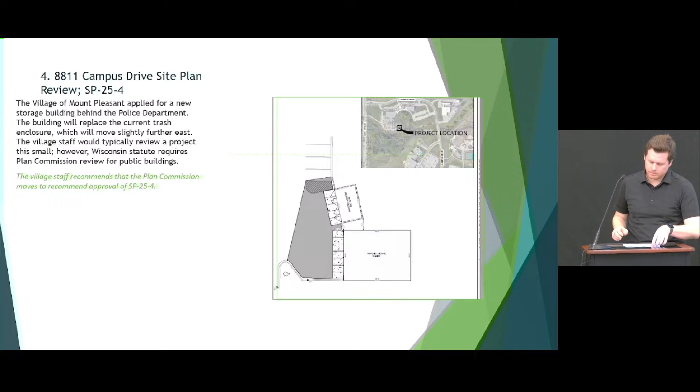I think we should lay it over and make him do a traffic impact analysis, and to Frank and Tom's point, where's the path, where's the... No. I'll make a motion to approve. Second. Motion and a second. Any further discussion? Call the question, all in favor? Aye. Opposed? Motion carries. Excellent.

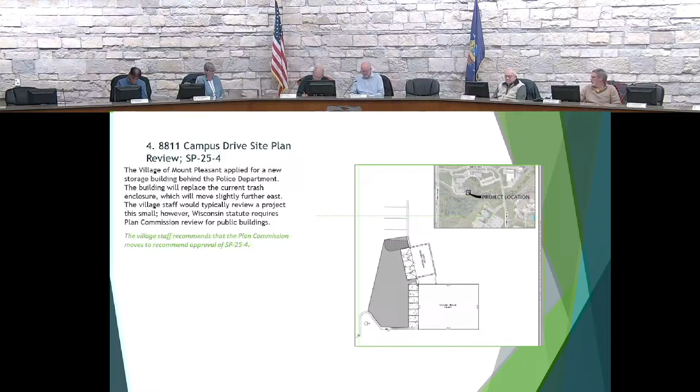Robin, are you up for your deal, or do you want to move it to another meeting? I'm punting, one because we just switched over our online servicer, so it's kind of pointless to give you the data from stuff that's closed. I should be able to get a much better product by the next one.

My report is exactly that, the village community development, building inspection, the permits that go through Public Works. We're all switching to a new permitting system that was approved by the village board through last year's budget. It more closely intertwines with the village's financing system. So anyone who's looking to apply for a permit or asks you about it in your role as plan commissioner, just know we are literally yesterday, today, and tomorrow in the process of turning that all on after about a week and a half of testing and months of prep beforehand. Shout out to Kathy Casper, our finance director, for leading the charge, and everyone else has been deeply involved too.

If you go to applications and permits, you'll see a little construction sign currently, which should be turned on in the next couple days. The reports we'll be able to generate, the data we're able to collect on the front end, should be a lot more detailed, something you'll like to see. So, good new permitting system. I'm sure there'll be bugs as we work through it, so if anyone complains to you let us know, because there's a lot of customization options in this version, and we'd like to know if there are any complaints so we can try to address it. Keep your ears to the ground, and if you want to build a new shed, that's where you'll end up going.